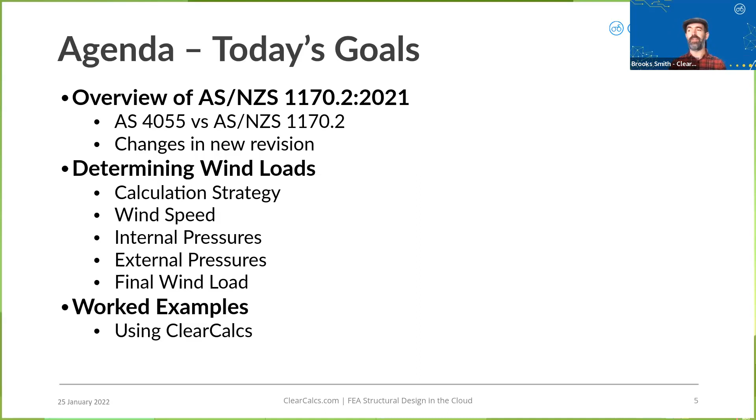So today's agenda, I'm going to give you a high-level overview of the 1170.2 standard, both in how it compares with AS 4055, the residential wind design standard, as well as changes in the new revision of the standard from the 2011 previous version to the 2021 version. And then I'm going to go through the general view of the calculations done in 1170.2. I'm not going to go through every single equation, but enough so that you can understand what goes into this and make sure you put in all the correct parameters when you're doing all these calculations. And finally, I'll give you a couple of worked examples using the ClearCalcs platform to determine your wind loads.

So first, starting with an overview, comparing with AS 4055, either standard will give you valid wind loads for a house. The difference is that AS 4055 is intended only for residential houses, so only class 1 and 10 structures. Basically, its intention is your house plus the garage or the shed or whatever else. A lot of farm buildings might be covered by it as well. But overall, there are some pretty strict geometry restrictions in addition to must be class 1 or 10 buildings.

So those are shown in detail on the bottom here, but essentially the building cannot be more than 8.5 meters high, 2-story building. Roof pitch can't be more than 35 degrees. Width has to be less than 16 meters. Length can be whatever you want, but width can't be more than 16 meters. 1170.2, on the other hand, is relevant for most structures you might ever encounter. So everything short of a skyscraper or an offshore oil rig is going to be covered by 1170.2.

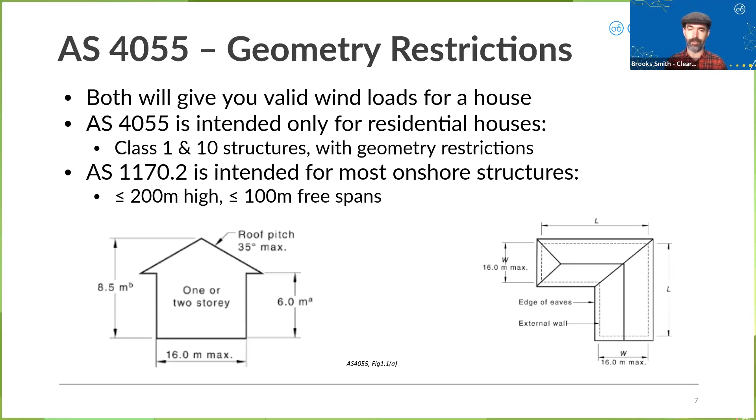The big thing that AS 4055 does is it makes a lot of simplifying assumptions. So it's trying to be conservative, but makes a lot of assumptions. 4055 technically is a derived standard. Technically, to write the standard, the committee goes through 1170.2, makes a set of assumptions, and that results in the tables in 4055. So it's entirely based on 1170.2.

Key things are that it simplifies about 10 different factors down to one of 10 discrete classes, N1 through N6 and C1 through C4 for non-cyclonic and cyclonic regions. Applies a worst case load in every direction, as opposed to 1170.2, where we look at each direction independently. There are fewer pressure zones. The standard assumes that the average roof height for any building designed in it is 6.5 meters. So if you have a shorter one-story building and you're using 4055, you're actually probably over designing your wind loads, because it assumes that every building has a 6.5 meter average roof height. That's what all these tables are based upon.

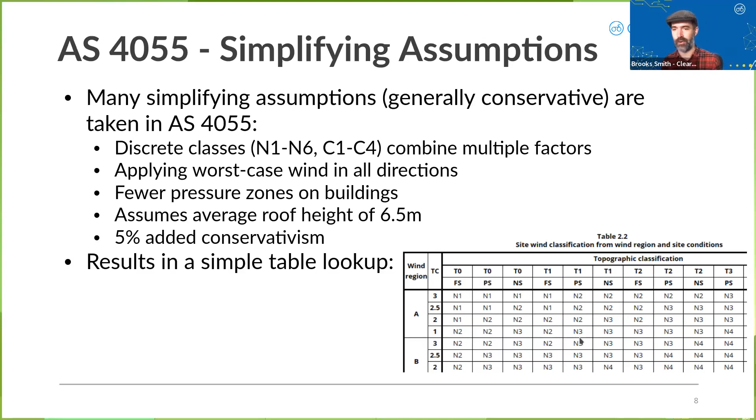And simply, it just has 5% added conservatism. Literally, they go through 1170.2 and then add 5% to the wind load, just to make sure that they're conservative. The advantage is that it results in a very simple lookup table. So most of 4055 is based around this one table where you look up which wind class you're part of. And that's most of the standard.

So I mentioned coefficients and factors being simpler. There are a lot fewer pressure zones in 4055. We'll talk a little bit more about this later for how it looks in 1170, but there are only 3 roof pressure zones for 4055: corner, edge, and general, or interior of a roof. And you look up a net pressure coefficient in a single table, as opposed to 1170, where you're going to separately calculate the interior wind load and the exterior wind load, and separately consider those.

And finally, in 1170.2, there are several K factors that are relevant for different types of elements within a building. You don't really have that in 4055. In 4055, you just say, this is the wind load on this part of a building.

In 1170.2, K factors can depend upon the total tributary area for your wind beam, and make further adjustments based on tributary area, type of cladding used, a few other factors.

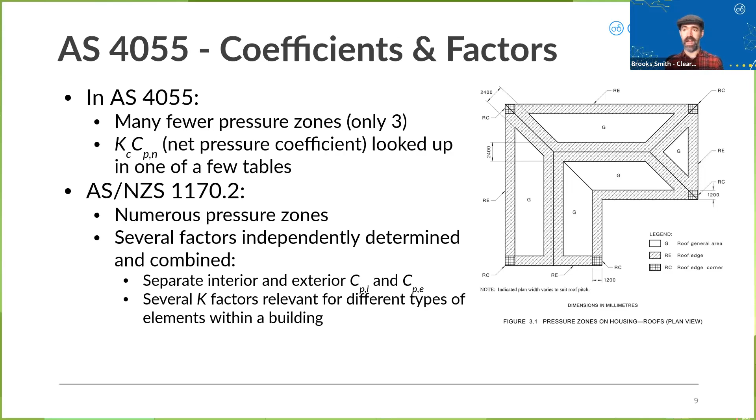And finally, the other big difference, and the one area where 1170.2 is simpler, is that 4055 has a completely independent separate section for calculating total uplift or total racking force. So it is a relatively simple lookup, but it is a separate lookup that makes a lot of conservative assumptions to get you a total racking force.

In 1170.2, you just simply take the sum of all your external pressures. So just a simple sum. There are a lot of external pressures you have to sum, but that's all it is. It is just a sum.

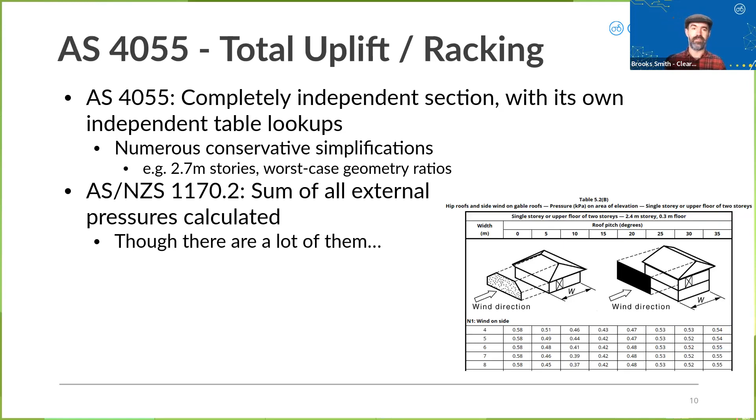So now looking at the changes between 2011 and 2021 versions of 1170.2, one of the biggest is that the wind region map has been completely recreated. So whatever you thought your wind region was from 1170.2 2011 or 4055 2011 or 2012, it may well have changed. So there's now whole new regions. A0, B1 and B2 have been split into separate regions, and New Zealand is now entirely independent wind regions. So A0 is basically the entire interior of Australia. Anything more than 200 kilometers from the coast is A0.

And we've also eliminated the special F sub C and F sub D factors for cyclonic regions in Australia. Instead, there's now linear interpolation allowed based upon exactly how far you are from the coast. I'll leave it to you to reference the standard for exactly how to do that. Doesn't make a huge difference, does make some difference. But in short, we removed those special F factors for cyclonic regions.

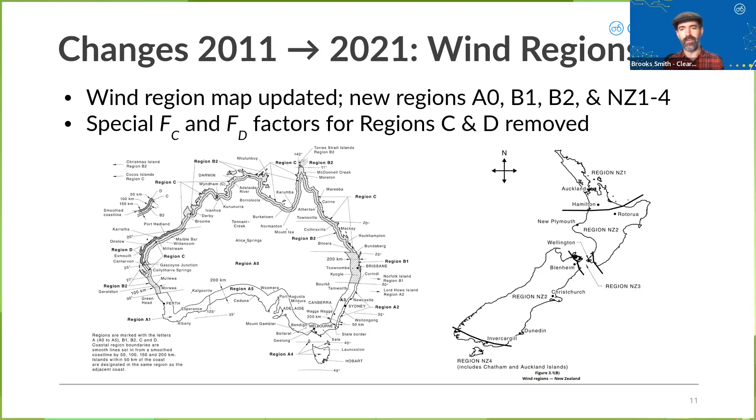There's also some changes to the multipliers now in 2021. There's a whole new multiplier that's added on to the site wind speed. That's a climate change multiplier, explicitly recognizing the reality that climate change is happening. So the area that I highlighted in purple along the map here, you will be applying a climate change multiplier of 1.05, effectively saying wind speed is going to be 5% higher within the lifespan of a structure that you build in any of those regions.

There are a couple of simplifying assumptions now made on the shielding multiplier and hill multiplier as well. Basically just saying that these multipliers can now be assumed to be irrelevant if your building height's greater than 25 meters, probably not the case if you're doing residential structures, or if a hill is less than 10 meters in height. So if a feature is less than 10 meters in height, you completely ignore it. We're not going to try and make you calculate every dinky little molehill in the area.

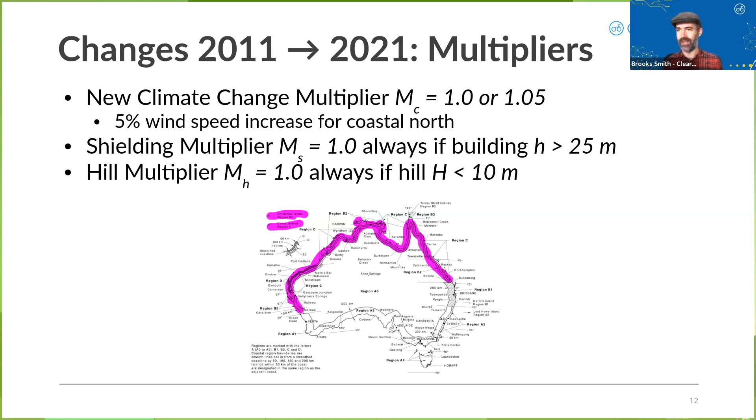And finally, there are some changes to the terrain categories and internal wind factors. So all intermediate terrain categories, except for 2.5, have been removed. And the definitions of the terrain categories have been modified and clarified. The biggest being that terrain category 2.5 is now explicitly for developing outer suburbs. If you're designing in one of the big development complexes in the outskirts of Melbourne or Sydney, you are now terrain category 2.5 pretty explicitly.

And I mentioned internal wind factors have some changes, especially if you have large openings in your building. So there's a new open area factor, K sub V, for open structures. It's mostly going to affect things like gazebos, but does affect verandas a bit as well. Effectively, it's going to increase slightly the wind pressure on something like a veranda that's a small area, but decrease the wind pressure on, say, a very large gazebo or a concert venue or something like that.

And the internal wind pressure coefficients now include area and local cladding factors as well. Usually this is going to reduce the internal wind load to take into account a bit more accurately how much wind is actually going to make it in through that large opening.

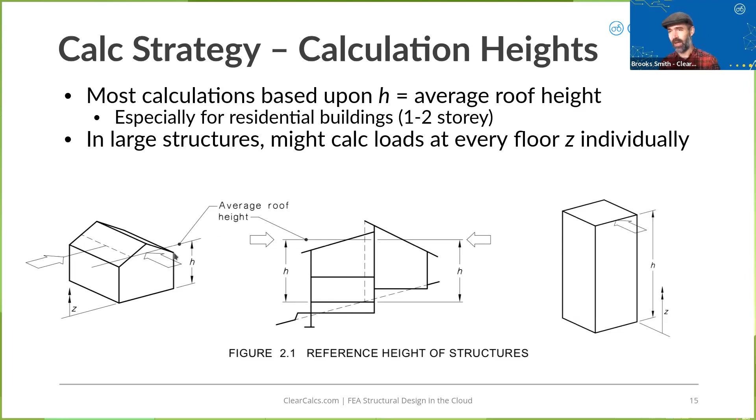There's some diagrams in the standard, some more than I copied here as well, showing exactly what average roof height means. If you have a rectangle, it's really easy. It's average of your ridge and your eave height. But if you have anything more complex, it can be a little bit of work to figure out that average roof height.

I mentioned one of the key differences with 1170.2 is that we are calculating wind load in every direction independently. So we're going to be looking at site wind speed in each of 8 cardinal directions. So north, northeast, east, southeast, etc. And then we're going to convert those site wind speeds into design wind speeds on each of the 4 surfaces of a building: the front, the right, back, and left of the building.

I would note that regardless of the location of your front door, it can be easier in many of these calculations to take the front for purposes of wind calculation to be perpendicular to the long side of the building if you have a hip roof, or perpendicular to the ridge of the building if you have a gable or monoslope roof. And just make your life easier for keeping track of what table lookup you use and how you match everything up in 1170.2.

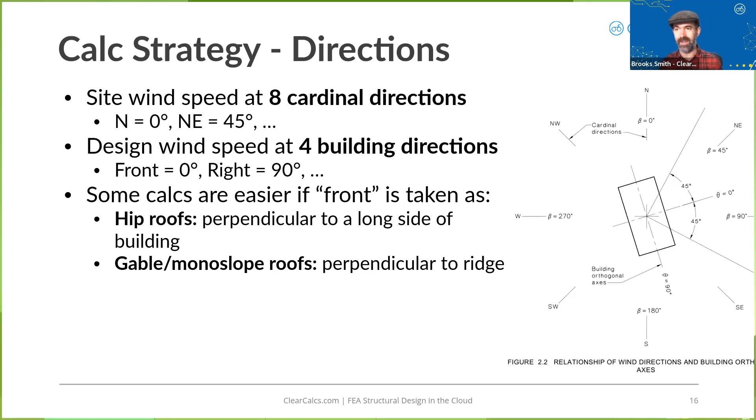Now, I'm not going to, as I mentioned, go through every single formula in 1170.2. If you're doing this by hand, you can look those up yourself. But I want to give you enough information here so that you can use, especially a calculator, accurately and understand what's going on in it.

So overall, the entire standard is based around two formulae. So one for the site wind speed, it's going to take into account a base wind speed, directional multiplier, terrain height multiplier, shielding multiplier, topographic multiplier, and I forgot to copy the new version of the standard here, and the climate change multiplier. You'll then convert that into a design wind speed based upon the orientation of your building.

And once you have a design wind speed, you need to convert that into a wind pressure to be applied to the actual structural elements of your building. That pressure is based upon the second formula here, which looks relatively simple, although I'd note this shape factor, C sub SHP, is doing a lot of work. It's doing a lot of heavy lifting and includes several different factors within it.

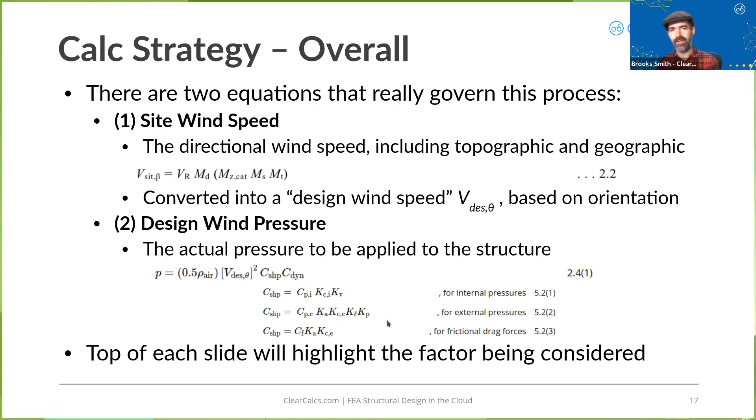To make it a little easier to keep track of, the top of each slide that I'm going to show here is going to highlight the factor that I'm currently considering as I go through this. So for example, you'll see the site wind speed formula on the top of this slide with V sub R, the base wind speed, highlighted in red.

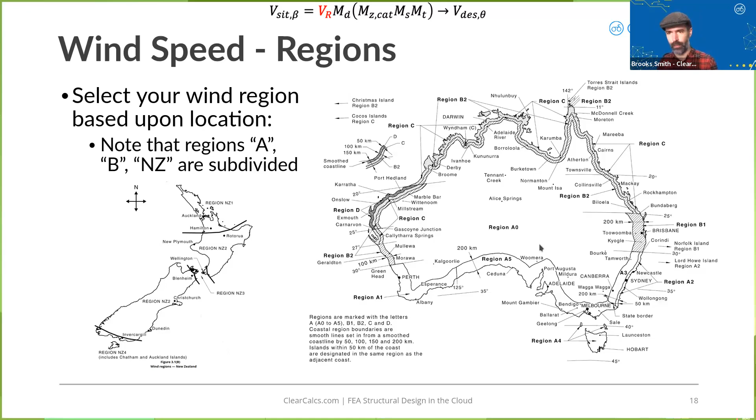Once you know the wind region you're in, then you have a couple of table lookups. So based upon the probability of exceedance that you want for your design, and this is defined in NCC 2022, so you don't have a choice on this, then you are going to look up in the table what your base wind speed is, V sub R.

For a typical house, which is going to be importance level 2, and either cyclonic or non-cyclonic regions, your ultimate recurrence interval is going to be 500 years, and your service is probably going to be 25 years. Service, you have a little more leeway to decide for yourself what the recurrence interval is going to be. But that's also important. Ultimate and service are considered separately. They have different base wind speeds.

And then you can just simply look up the directional multiplier in one table that tells you wind in a particular direction, often westerly, is going to be slightly stronger than wind in other directions.

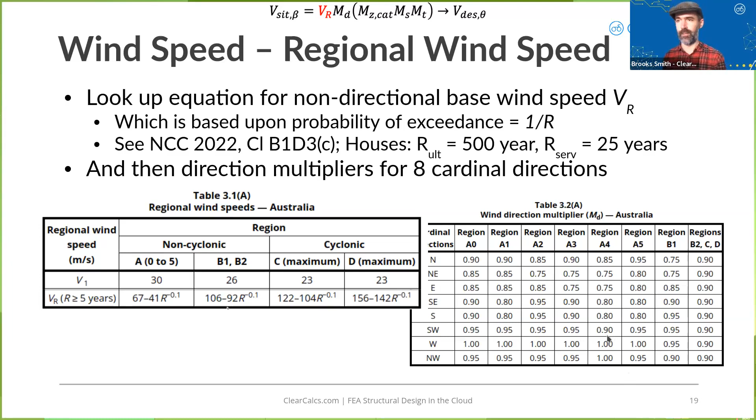Next, you have a terrain/height multiplier, M sub Z. So for this, you need to know your terrain category in each direction. Often the terrain category is going to be the same in every direction, but not always. Say if you're on the edge of a development, maybe it's going to be completely open space in one direction with lots of houses in the other direction. So that does need to be taken into account.

If the terrain category varies as you move outwards, then you can average it. And it's taken out to a distance of a maximum of 0.5 kilometer or 40 times your average roof height.

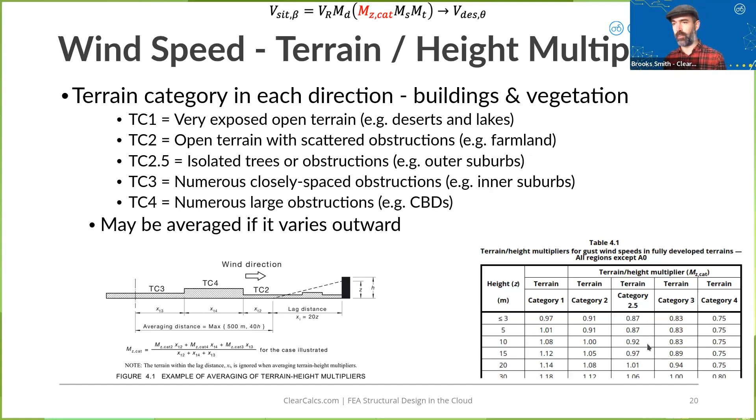And then once you know your terrain category, you just simply look up your multiplier value in a table. Next is shielding. So terrain/height looked at both buildings and vegetation. Shielding is going to look at only buildings. So how many buildings are going to help prevent wind from reaching your structure.

Importantly, this is looking within a distance of 20 times the average roof height. Now note that terrain category was looking 40 times the average roof height. This is 20 times the average roof height, smaller radius. And you're only going to be looking at buildings that have a height at least equal to your calculation height, your average roof height. And you're going to look independently in each 45-degree arc from your structure in each cardinal direction.

Now, one slightly tricky bit here, you have to first calculate a shielding parameter. And one of the factors in that is defined as the quote average spacing, L sub S. Doesn't actually mean average spacing. Do not just simply take an average here. There's an explicit formula. So it's not really average spacing, even though that's the term used to define it. Plug into this formula. If you use a calculator like ClearCalcs, we're going to do this for you, but important to know that average spacing is not actually average spacing.

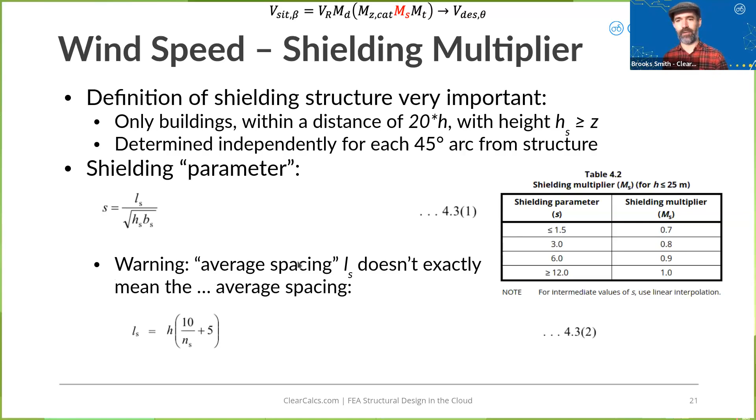And finally, your topographic multiplier. So this is going to be looking at only the topography around. So you're going to consider features within the closest of 0.5 kilometer or 20 times your average roof height distance. And again, one of the modifications in the new standard revision here is just completely ignore anything that's less than 10 meters in height. So you have a formula based upon exactly the geometric parameters of your hill or escarpment as in a plateau. And for Australia, that's all you need. In Australia, all we care about is the hill shape multiplier.

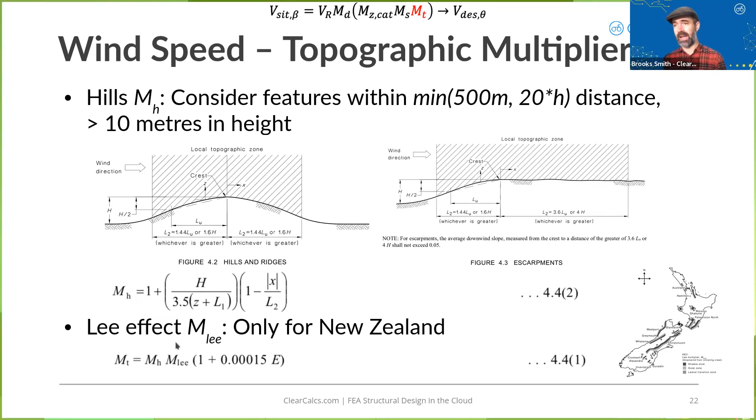If you are in New Zealand, you do have an additional factor that's relevant in little shaded areas on a map that exists in the standard. I'm not going to go through how that Lee effect multiplier is calculated, but you end up having to combine your hill shape and Lee effect multipliers together if you are in New Zealand.

Now, once you have all those multipliers, including your climate change multiplier, then you have your wind speed in 8 cardinal directions, in each of your north, northeast, east, etc. directions. But how do you apply that to the building you have? Well, your building has a particular orientation to it. So we're going to take the perpendicular out from each face of your building. So let's say your house is facing a direction of 10 degrees.

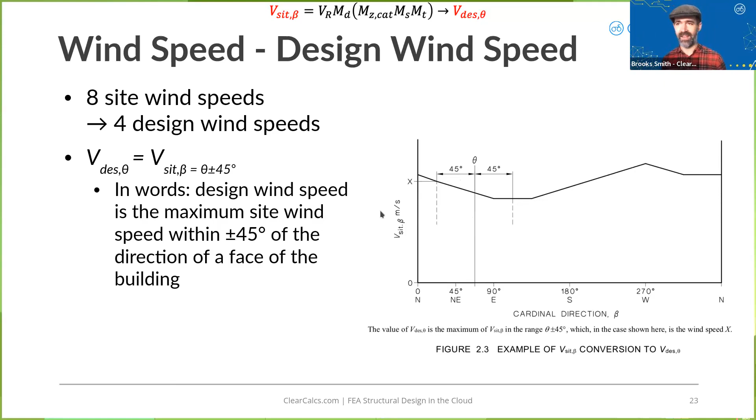I'm going to look between north-northwest and east-northeast for the wind load on the front of my building. I'm going to find the maximum site wind speed within 45 degrees to either direction from the face of my building. And that's going to give me my design wind speed. That's how we simplify 8 directions to 4 directions.

So in ClearCalcs, we'll show you 2 different graphs to try and make this clear, showing both ultimate and serviceability wind loads. And you're going to convert that site wind speed in 8 directions to the 4 directions for however your building is oriented.

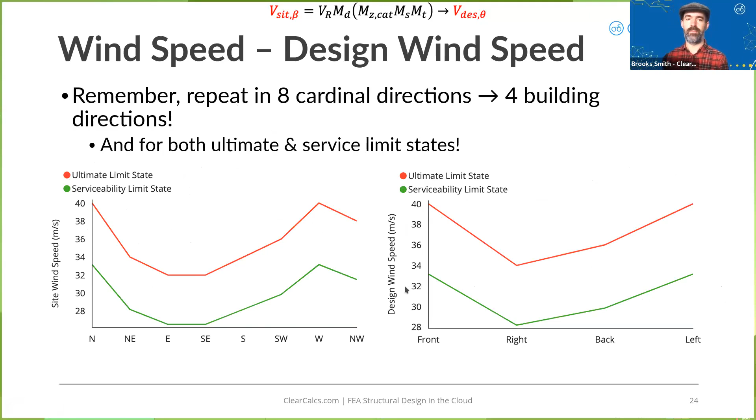Now, most structures you design, if you're working in a residential world, are going to qualify as permeable structures. There is a 10-page section of 1170.2 that goes through tons of intricacy defining what an opening is and how much opening you need to have or not have to qualify as permeable or impermeable. In general, though, and this is me massively oversimplifying 10 pages into 1 sentence, anything that can be opened, including doors, windows, ventilators, etc., is going to qualify as an opening for the purpose of this standard.

The exception is you can get specially designed doors and windows that are designed to be resistant. So this is not going to be the typical door you go pick up at Bunnings. It does have to actually be specially designed to withstand wind loads in whatever region of the country you are in.

The vital parameter when you're looking at internal pressures, and this is a hard one for us to even ask about in our calculator because it is a mouthful of a parameter: the ratio of the area of openings on one surface to the sum of the total open areas on every other surface of your building. So this includes your roof. Essentially, it's going to measure how balanced your openings are between different surfaces.

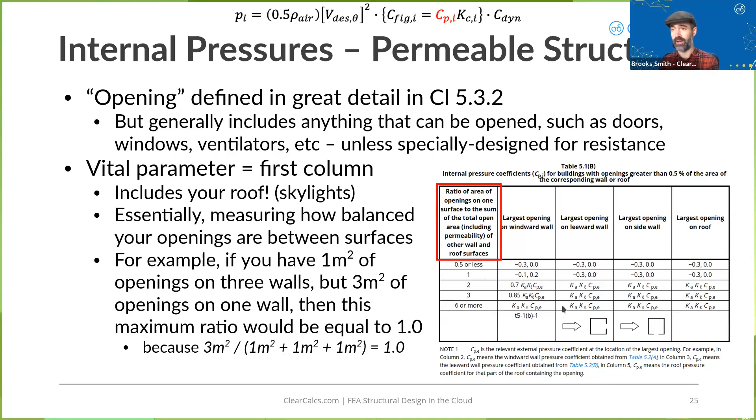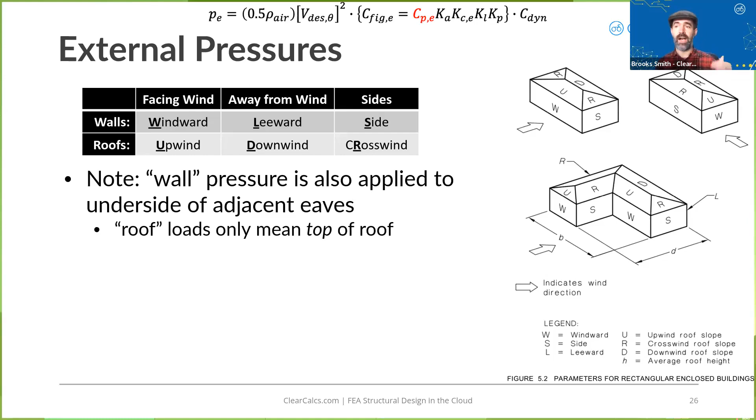External pressures, an important point here is just the terminology used. So there's different terminology for walls and roofs. I put it into a table here to try and simplify it a little bit more. So if you're facing the wind, the wall facing the wind is called the windward wall. The roof slope facing the wind is called the upwind slope of the roof. Away from it is leeward or downwind, and wind coming from the side, it's your side wall or your crosswind load on the roof. Now, just one particular note here, the wall pressure gets applied to the underside of eaves. So the roof load that you calculate in external pressures is only applied to the top of a roof. To the underside of an eaves, you apply the wall load.

So the external pressure is a ton of different table lookups for every direction in roofs or walls. Not going to go through all of those. In general, it's going to give you either 2 values, a minimum and a maximum, or a simple formula. A couple of warnings when you're using these tables. Several of those lookups depend upon some geometry ratios for your building: depth to breadth or depth to roof height. But which parameter is D and which parameter is B changes based upon the wind direction you're considering.

So if you're considering wind that is heading towards the long side of your house, then D, the depth, is going to be the short dimension of your house. It's going to be parallel to the wind direction. If you're considering wind that's heading towards the short side of your house, then D is going to be the long dimension of your house. So that changes depending upon which direction of wind you are considering.

And also for side and crosswind, there are multiple different pressure zones that you ideally should be considering, up to 4 of them, depending upon the distance from the windward wall or the windward edge of your structure. If you're designing a house, this may not matter that much to you because you may just be making the entire wall exactly the same strength. And in that case, you might just only be looking at the maximum pressure zone. So you as an engineer can make some simplifications of 1170.2 here as you go. But if you want to be really precise, there are lower wind pressures the further you are from the windward edge of your structure.

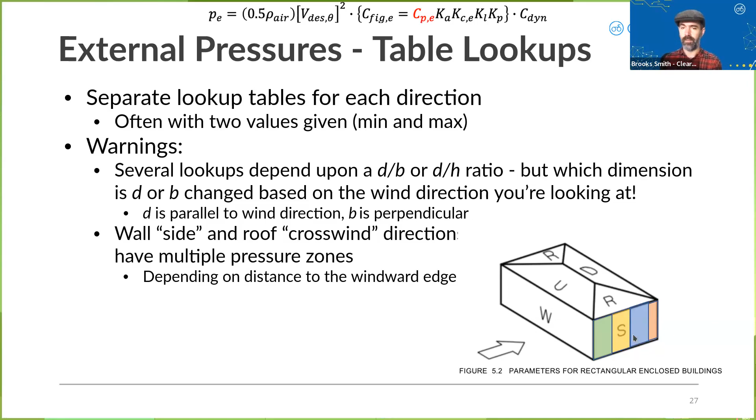So once you have all those shape coefficients, you have a whole bunch of constants that get considered. So up till now, all of those shape coefficients, everything for site and design wind speeds, you only need to do that once per building. But most of the K factors here depend upon the specific element that you are considering. Element being a beam or a column or a connection or whatever it may be. So these K factors can depend upon which element you are looking at.

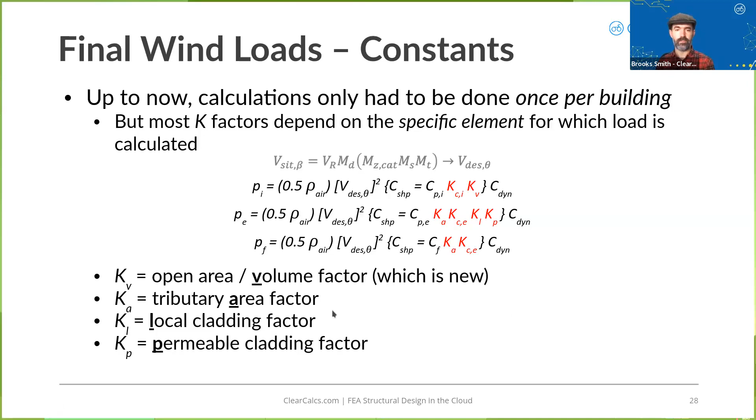The main ones here are the volume factor for an open building internal pressure. This is a new factor in 2021. You have a tributary area factor, a local cladding factor, and a permeable cladding factor, all relevant to your external pressures. And finally, there were also some K sub C values in there. Those are your combination factors. If you're designing a typical house, you may not care about these because you may just be looking at only one wall that's acting semi-independently structurally, for example. But if you're designing a portal frame or something along those lines, these can matter quite a bit.

Essentially, this says that all of the wind loads we've calculated up to this point are based upon worst case wind loads. But it's unlikely that you're going to get worst case wind loads on every single surface of your building at exactly the same time. So let's allow you to take a reduction of all of your loads to account for that fact, to account for these probably not all going to happen worst case simultaneously.

There's a giant table, 5.5, in the standard itself that gives you tons of examples with diagrams of exactly what this might mean in real life. But all of it comes down to just 2 sentences in the standard. So it's saying that if 2 surfaces act together in combination, if each surface is going to contribute to the strength you need to consider of the portal frame or whatever it is of the system, then you can take a combination factor of 0.9. If you have 3 or more surfaces acting together, then your combination factor is 0.8.

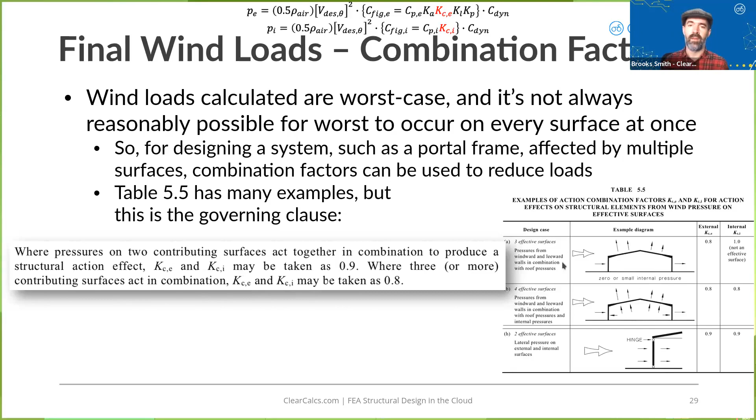So finally, in ClearCalcs, we try and simplify by putting all of those building parameters together in one calculation that we do for you in our calculator. And then we separately, at the end, apply all these K factors, which can vary by element. Overall, through all of this calculation, you're going to end up with internal and external pressures for 4 different wind directions and 4 different sides of the building. So even just looking at your front wall, you have windward loads, side loads, and leeward loads. So you need to simplify all that down to, well, what's actually the load I'm going to apply when I'm designing this beam or this column?

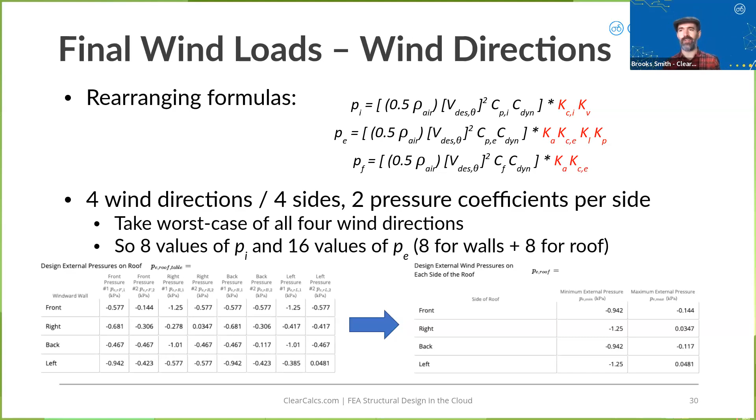Essentially, you're just going to take minimums and maximums. You're just going to take the worst case of all 4 wind directions, and you're going to end up with 8 values of an internal pressure and 16 values for an external pressure. So 8 for walls, 8 for roof. And now with those 8 plus 16 values, you can finally calculate the actual wind loads on your beam or your column or whatever element you're designing.

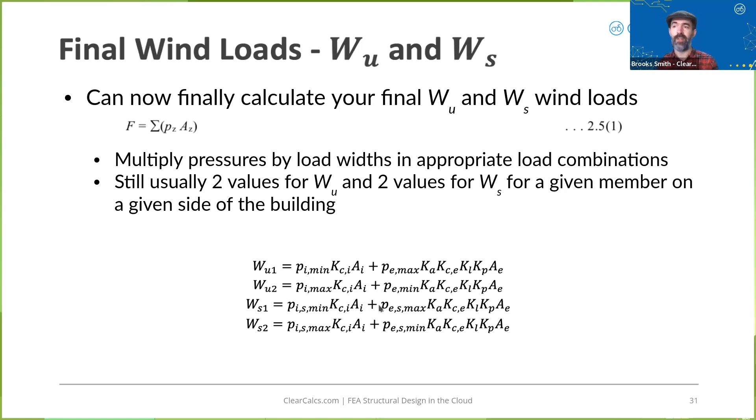So you'll end up with usually 2 ultimate loads and 2 service loads. So for example, you might be taking the minimum internal pressure plus the maximum external pressure with all the appropriate K factors applied to it to get 1 ultimate wind load. And then another ultimate wind load is going to be the maximum internal plus the minimum external. Similar for service loads. So you'll typically end up with 4 different wind loads to apply to every individual member.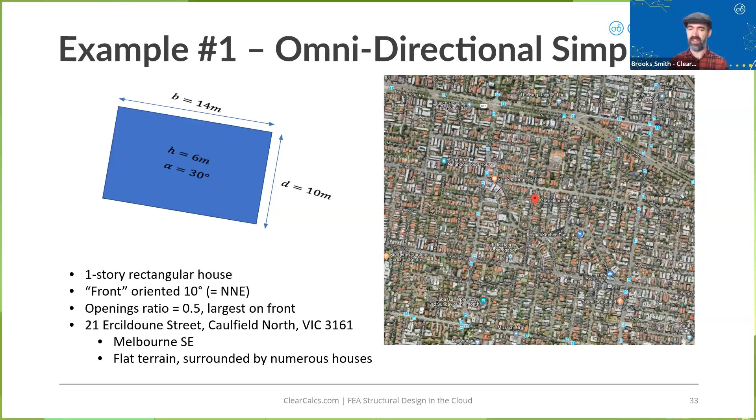So now I'll go through some worked examples in ClearCalcs. I've got a couple of examples, one for a simple structure where we're going to assume that every parameter is the same in every direction. We're going to do this as simply as possible, but still use 1170.2 instead of 4055. So that's going to be a relatively simple example. It's going to be in Victoria, so non-cyclonic. And then we'll take a directional approach where we pick a site where terrain is very different in every direction, so we will want to customize all the factors in every direction. This is going to be based in Queensland, so there will be some cyclonic loads relevant there.

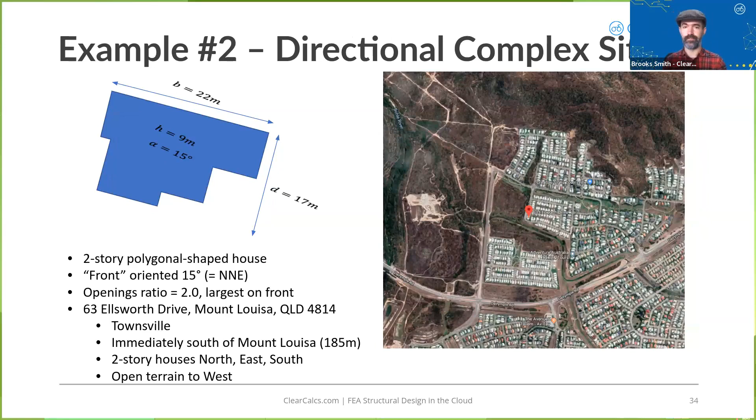So let's go through how this is going to look in ClearCalcs. Let me go to clearcalcs.com. I log in, and I'll use my Google login for my company account. Then our platform is based around the idea of projects. So typically one project is going to be one house or one structure, whatever I'm designing, but you can group it however you'd like.

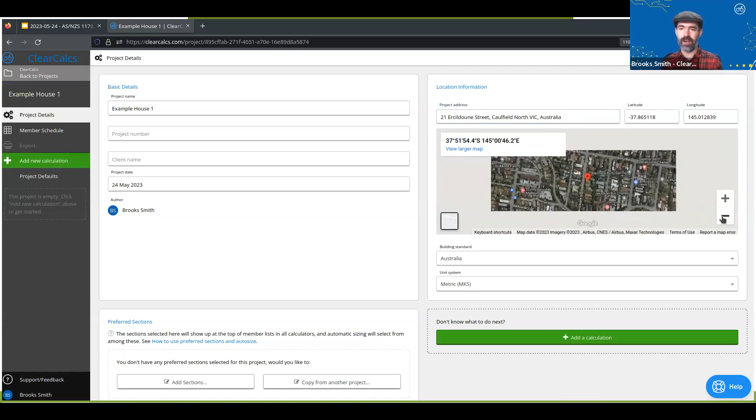So our first example here, let's say example house 1 was at an address in Caulfield North. Now, I just picked random addresses looking at Google Maps. I have no idea whose house this may or may not be. But this particular house, well, it's just suburb for kilometers in every direction. So it's a pretty flat area right around here.

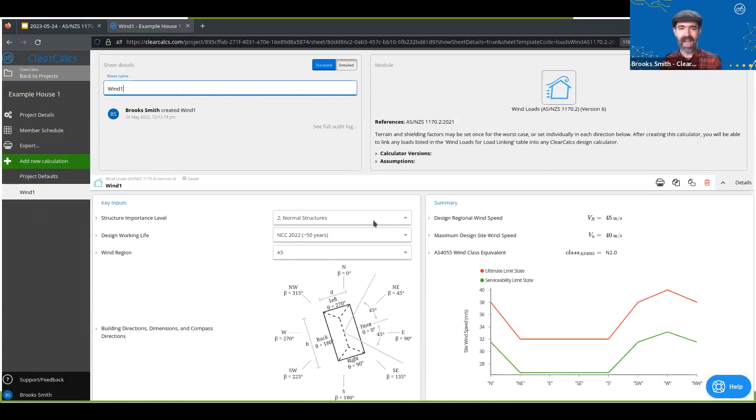So let's add a wind calculator. We have enough calculators in Australia now that you may want to filter when you are looking to add a wind calculator to get to it quickly. But let's go through some of these parameters. So this is a normal structure. It's not going to be an uninhabitable farm building, and it's not a hospital that has high importance. I'm going to design to NCC. That's going to be your usual. It is, in fact, wind region A5. Melbourne is wind region A5, and Caulfield North is a suburb of Melbourne.

We said that this particular building, the front of it was oriented at about 10 degrees, so just shy of north-northeast. Had a breadth of 14 meters and a depth of 10 meters. So I mentioned that it's a little bit easier to call the front of your building perpendicular to the long side. So usually when you enter this in, your depth is going to be less than your breadth.

It's a hip roof and a roof height of 6 meters with a 30-degree roof pitch. Now, that maximum ratio of area of openings, that mouthful of an internal pressure parameter, we're going to assume that's 0.5 with the largest opening on the front. Maybe there's some big lounge room window on the front of the building.

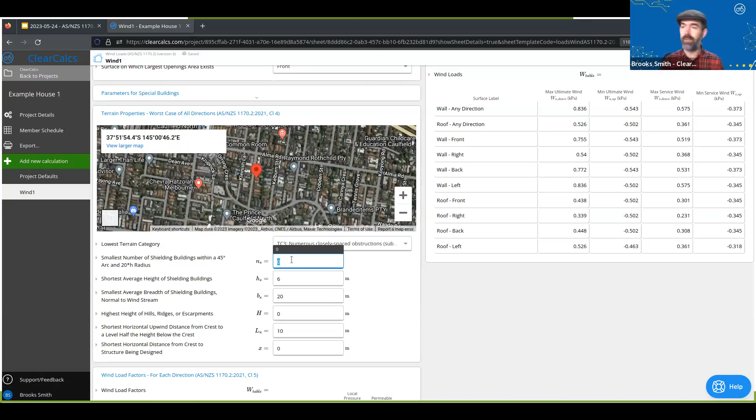There are quite a number of shielding buildings. Every building in this region is basically the same size. They're all 1 or 2 story buildings with a roughly 6 meter roof height. I could actually count these up on the map that we show here, but to save time, let's say that's 15 buildings within that radius. I'll say that they are all going to be just the same height of the building I'm designing, and maybe with a slightly smaller average breadth. Let's be a little conservative here.

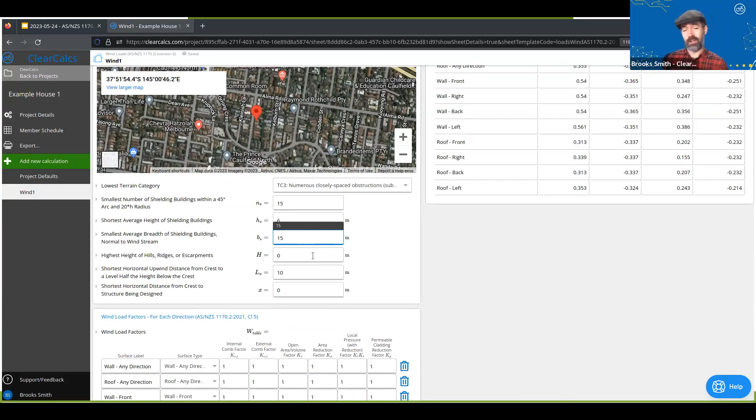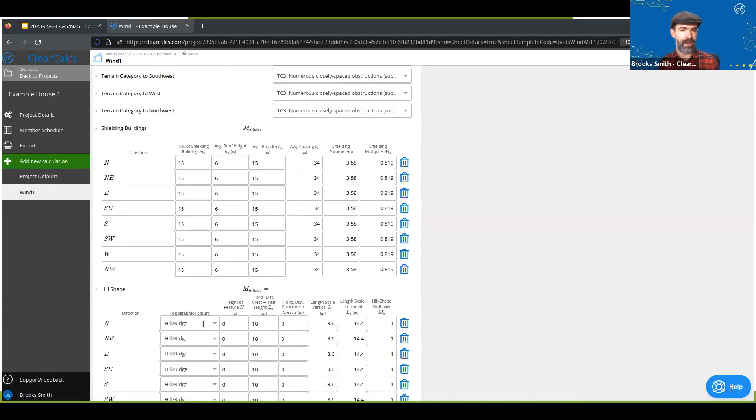There are no hills around here, so highest height of hills is just totally irrelevant. And I'm done. That's it. That's all I need to enter here. That gives me all of the relevant parameters for wind. If I wanted to, I could go and customize every single one of these parameters for every individual direction. But in this case, I'm not going to.

If I want to design for individual elements, we default to showing you some common ones here, but maybe you might want to design a particular wind beam. Okay, maybe it's wind beam 1 and it's going to be on my front wall. I could enter in what are the combination factors here for this. Well, those are probably going to be 1. This is an enclosed building, so my volume factor will be 1. Area reduction factor might be relevant here. I could go through that calculation. Let's just say it's 0.9 here.

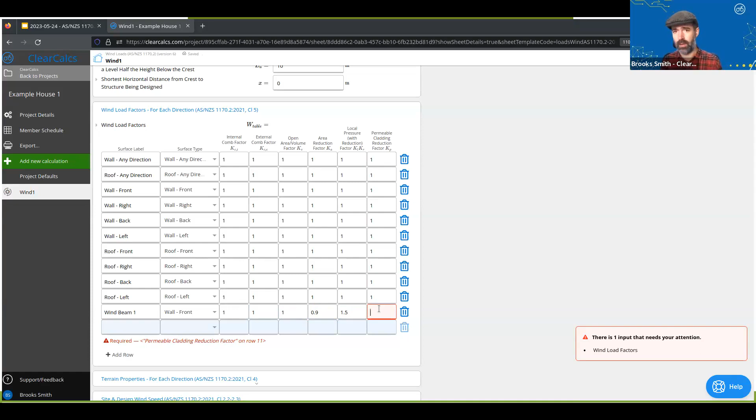And local pressures, let's say we do actually have some local cladding that we can take into account here. Maybe this is 1.5. And permeable cladding, maybe we do have permeable cladding, so maybe this is 0.9. We are leaving these K factors up to you as the user to calculate, but we'll end up giving you all the relevant values here.

Now, at the end of the day, the end results here are going to be a site wind speed, which you'll notice we are calculating for every cardinal direction independently, as well as a design wind speed. Now, why doesn't this design wind speed for ultimate fully match up here? It's because there's actually a hard minimum in NCC saying that the minimum wind speed for ultimate design has to be at least 30 meters per second. So this is taking a minimum of 30. And then we actually have slightly higher on one particular wall of our building, 30.6.

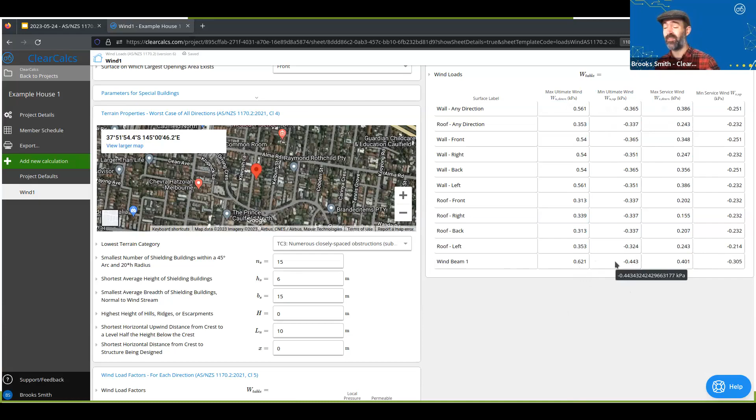Serviceability, on the other hand, has no limitations to it. So on the right side of our building, we actually have very little service load on wind. We'll then have a table of wind loads here, where I mentioned you're usually going to want to end up with 4 wind loads: ultimate wind load, maximum and minimum, service wind load, maximum and minimum. I added my wind beam 1 on the last row of this table. So that's giving me some particular ultimate and service wind loads for my wind beam right in this table. So this can provide you all of the wind loads necessary for all of your calculations here.

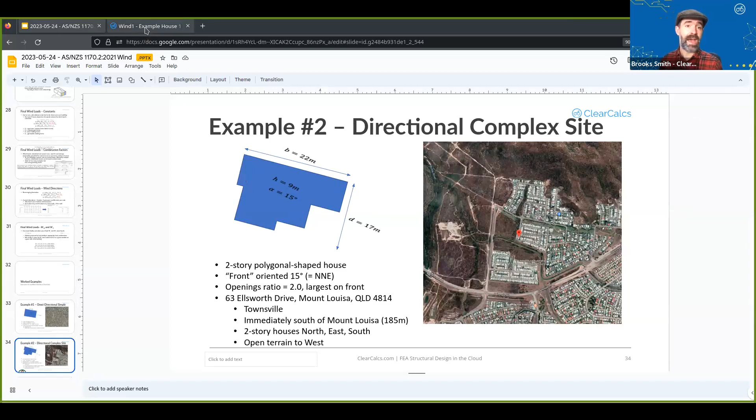So that's our first example. That's a relatively simple one. Everything's the same in every direction. But we can also look at a more complex site. It's giving me a cyclonic region. Everything varies in different directions. So let's look at this example and how that might be entered. Let's create a new project for this because this is going to have a different address associated with it.

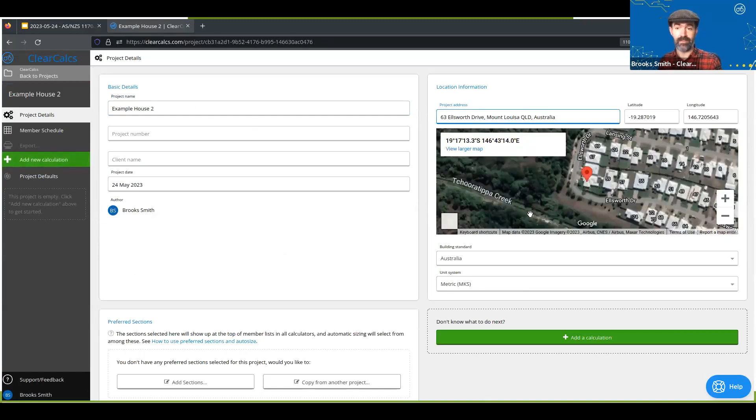So example house 2 here. I picked an address of 63 Ellsworth Drive in Mount Louisa, Queensland. So this is right on the edge of a housing complex with lots of topography in every direction around it, including a nice big hill to the north. So let's add our wind calculator here.

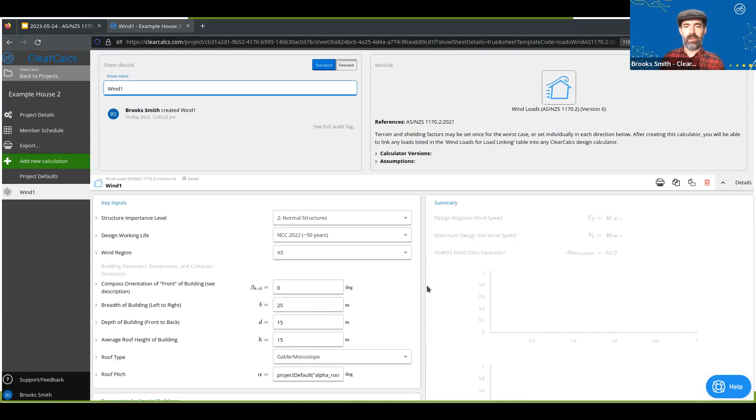Now, this is still going to be a house, so it's still a normal structure, design working life based on NCC. This is going to be, however, in a wind region. I actually forgot to check this before our webinar, but I believe it is B2.

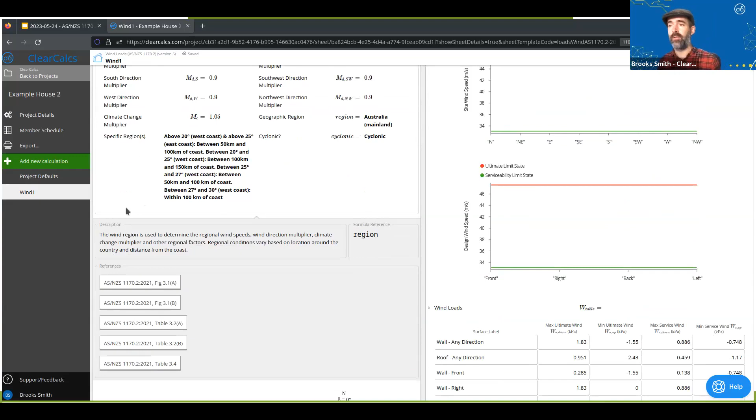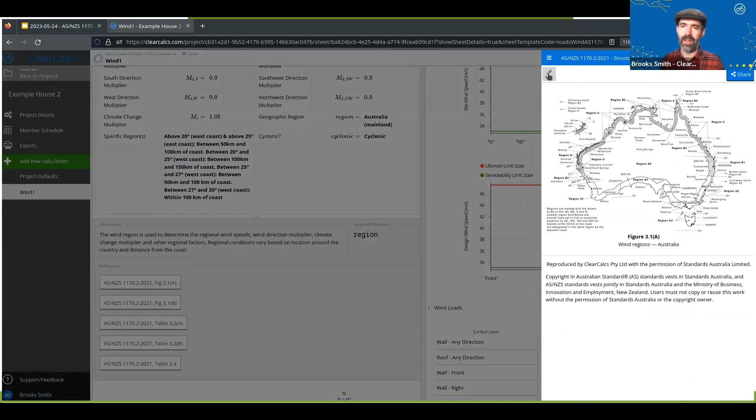If I forget to check, I can open up, and we now have integrated standards in ClearCalcs. So let's say I want to go check what the map is. I can click on the reference to 1170.2, figure 3.1a. Here is the map for our wind regions. So here I can go see which region is relevant for entering in here.

This particular building is aligned so the front is at 15 degrees. So it's still semi-north facing. The breadth of the building in total is 22 meters, depth of 17 meters, roof height 9 meters. And we are saying that this has a hip roof as well, with a relatively shallow pitch of 15 degrees.

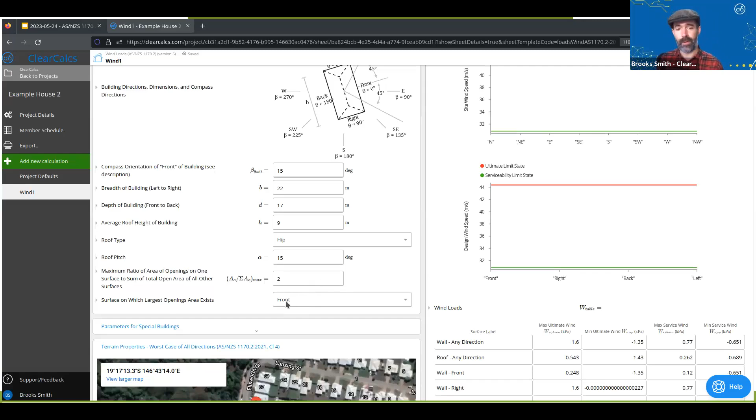So this is going to have a much bigger openings ratio. One particular side of this has multiple doors and a ginormous floor-to-ceiling lounge room window. It's going to be on the front of the building. So I could still make use of the section looking at terrain properties, worst case in all directions. It might make it a little easier for me to enter in some of this data for worst case initially, because that will then get copied and propagated through as defaults to make my life a little bit easier.

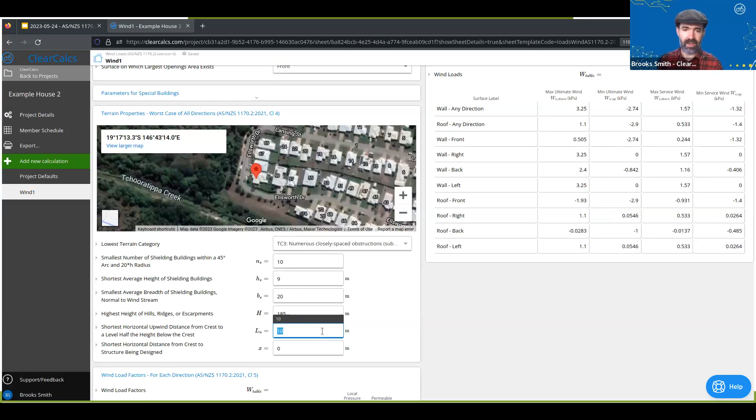So only a couple directions have shielding buildings here, but it looks like they're a little more sparsely spaced. Maybe there are 10 of them within a 45-degree arc. Let's say they're still all basically the same height in the area. That's often true. I do have one hill in the region where Mount Louisa is 185 meters in height, and the L sub U factor for it is roughly 60 meters. Then the horizontal distance from the crest of that structure is about 250 meters to this building. So I can enter all of that in and then go to my terrain properties in each direction.

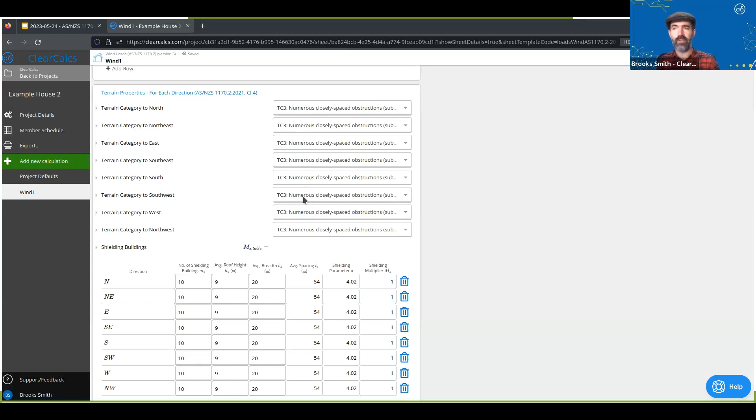So terrain category to the north, northeast, east, down to the south is still all basically suburb. So terrain category 3 for north through south. But once we start going west, it's more sparsely vegetated scrubland. So that's going to be more like terrain category 2 or 2.5. Let's be conservative and say 2.5. So it's going to update that.

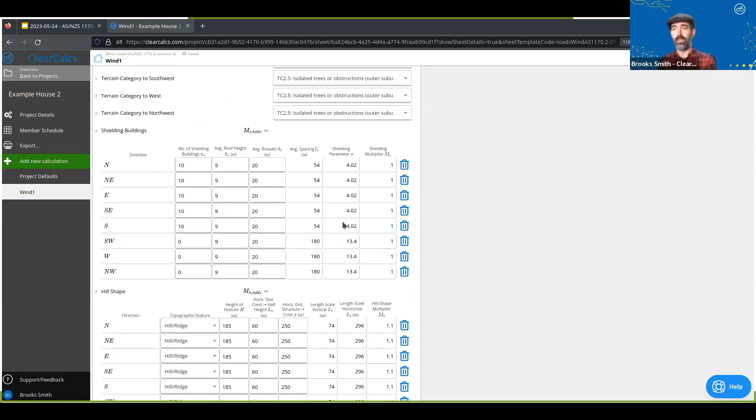Similarly, in those westerly directions, I have no shielding buildings. So let's say 0 shielding buildings in those directions. We'll keep everything else the same for my north through south directions. Hills. I only have hills to the northerly directions, north and northeast. So I don't really have any hills to the east through southwest. So let's zero out those. To the west, I have some smaller hills. They're going to be more like 20 meters or so.

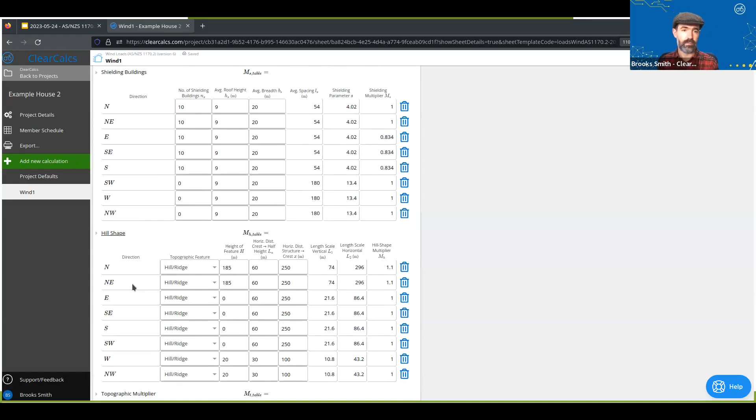You may want to spend a bit more time figuring out exactly what these parameters are than I am here. I'm just giving you some demonstration of what you might want to be doing when you are entering in these different parameters. So this is going to go through and figure out all of the hill multipliers in every direction based upon my distance to Mount Louisa and everything else around here. So once I've entered that in, the Lee multiplier is irrelevant, only relevant for New Zealand here. So that's everything I need. That's going to, again, give me different site wind speeds as well as design wind speeds.

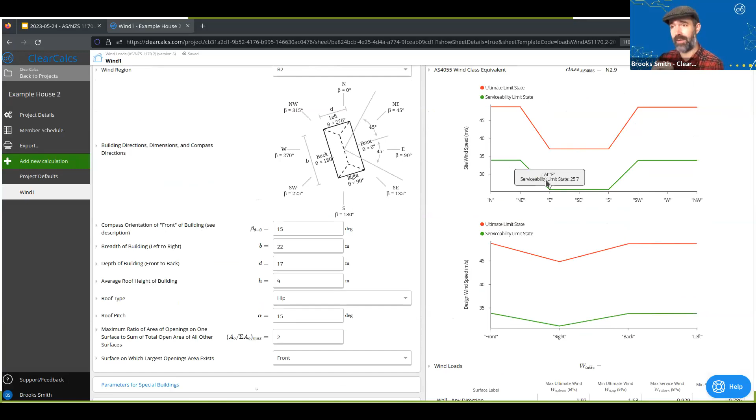Now, this looks fairly different between my site and design wind speeds, and that has to do with the topographic factors that we entered in that amplify some of these site wind speeds in different directions. And again, we end up with our 4 different wind loads, 2 ultimate and 2 service, to be applied to each of my elements in the building.

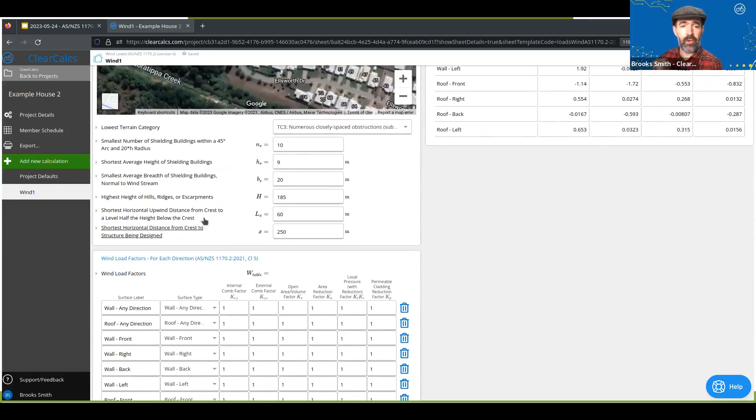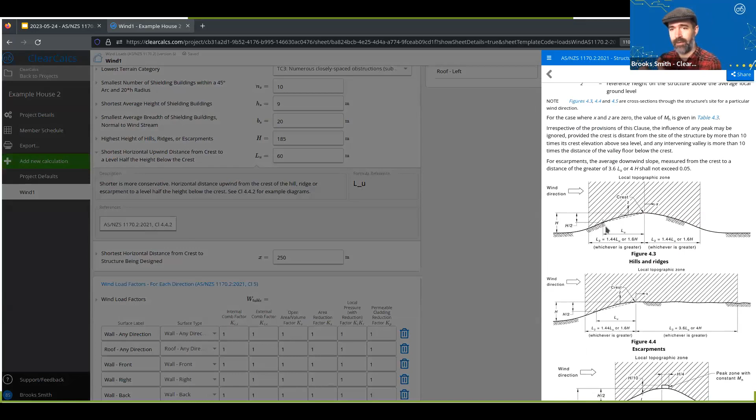I'd also just point out while I'm here, if I forget what any of these factors are about, say L sub U, which is kind of a pain of a factor to calculate, I could click on this reference, and here's my whole section on the hill shape multiplier, including all of my diagrams for, well, what is this L sub U thing? I can go reference this, figure out what it is, figure out how to calculate it, and see the actual standard. This is the most recent version of the standard you are able to see in reference live.

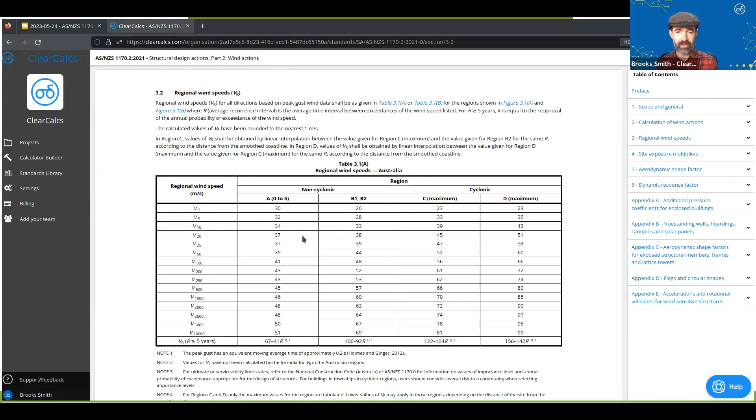If you want to just see the standard, we also have a standards library now as well. So let's say I just want to see the whole 1170.2 standard. I can click into that and then navigate through any section that I'm interested in seeing. Maybe the regional wind speeds. Here's the whole table for regional wind speeds that we're automatically calculating for you in ClearCalcs, but maybe you want to see it yourself.

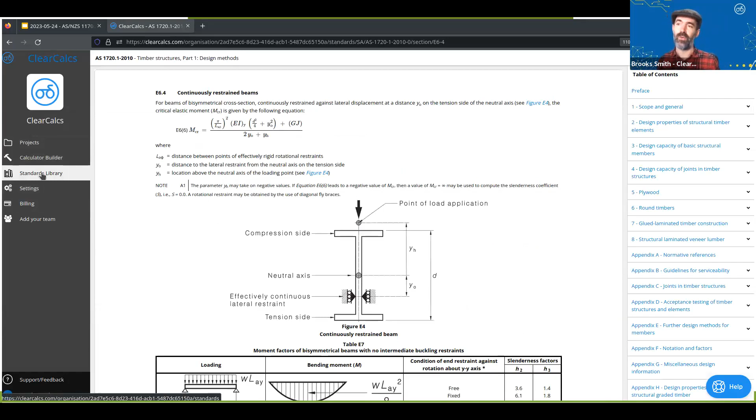If you aren't sure what standard has particular information in it, maybe you want to just search for timber beam and figure out, well, what is the relevant standard for that? We're going to allow you to search within the standards. Maybe timber beam moment, if I want to be really specific. And that's going to tell me, well, maybe Appendix E here is going to tell me some information about the moment for continuously restrained beams. We're still tuning some of our search to make it as helpful as we can, but you can search through all of the NCC standards using ClearCalcs here.